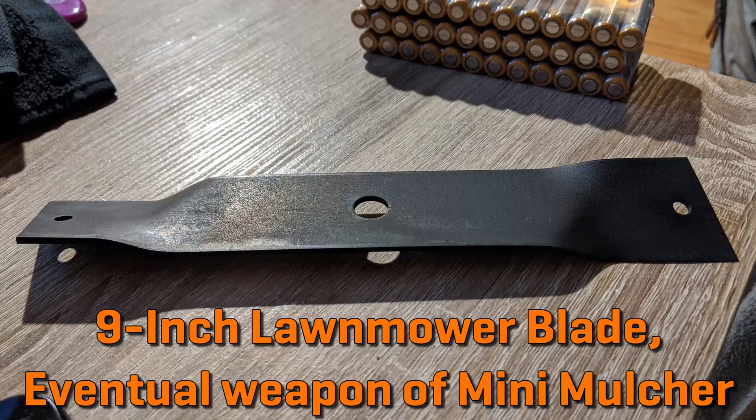I found out about the Mulcher when listening to blacksmith captain Al Kindle's interview on Behind the Bots a couple weeks ago. Here's what he said then.

There was also another bot called the Mulcher that they wouldn't even let start that not many people know about. It was like a lawnmower kicked up at a 45-degree angle. So it was literally the bottom of a lawnmower built into this weird frame, and there's a video of that somewhere too, doing a little demo and cutting up some foam. So it was a learning curve because again, the event runners didn't know what would show up, and you know, some people were a little ahead of the curve with dangerous stuff.

This is pretty much the only photo of the Mulcher that I could find existing online, and the original photo was 300 pixels wide. Yay 1995 cameras. So I've upscaled it about 8 times with a little bit of denoising, and it still looks kind of like crap, but you can get a much better idea of what's going on underneath that really bizarre looking frame from this photo, even though it's still horrendously noisy and gives you almost no real detail of the lawnmower underneath.

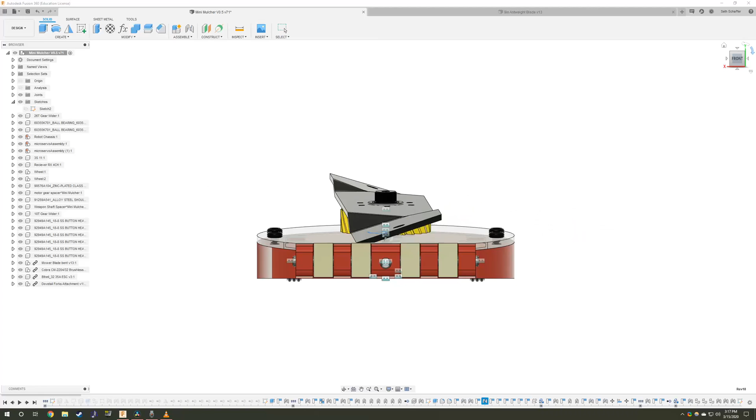As you can probably tell, there were quite a few horrifying things about that bot. To be honest, I didn't look too hard and wasn't able to find that video until this morning, so I designed my entire robot without seeing that. I actually was mostly inspired just by the fact that it used an angled lawnmower blade as a weapon, since about a month ago I was asked if I might be able to use some lawnmower blades for a combat bot and was handed these babies.

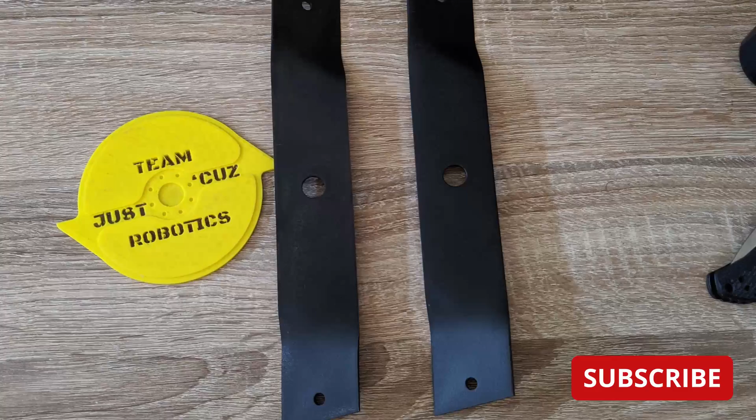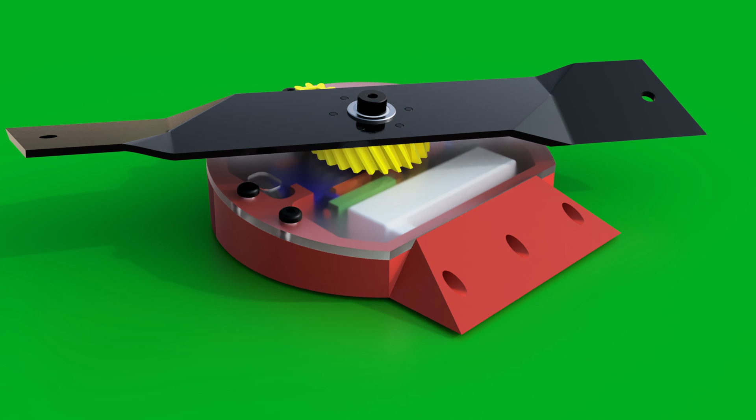So my goal for Mini Mulcher is to accomplish 3 things. 1. Make an interesting Antweight robot. 2. Make it affordable and easy to make. And 3, create a detailed build video series so viewers can follow along. That way, you guys can potentially make this too, maybe as a second build or an intermediate level bot. It would be a bit too dangerous for a first-time builder, but I would say this should ultimately be a pretty simple build for anyone who kinda knows what they're doing.

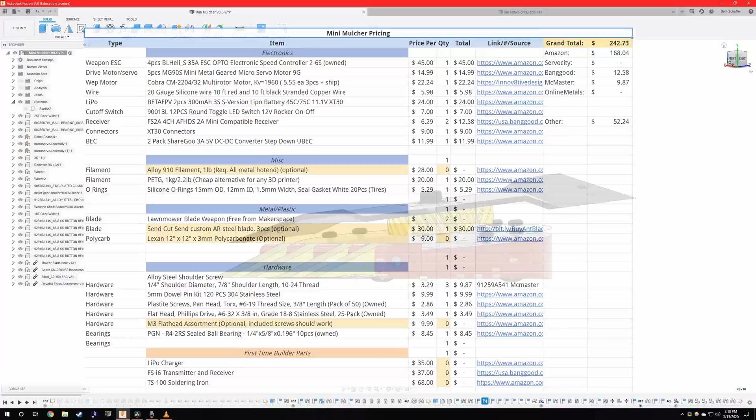The budget for this bot itself is less than $250. It'll be manufacturable with just a 3D printer and basic tools like a handsaw or maybe bandsaw and a Dremel. If you already have wires, connectors, and other common components, you could be looking at well under $200.

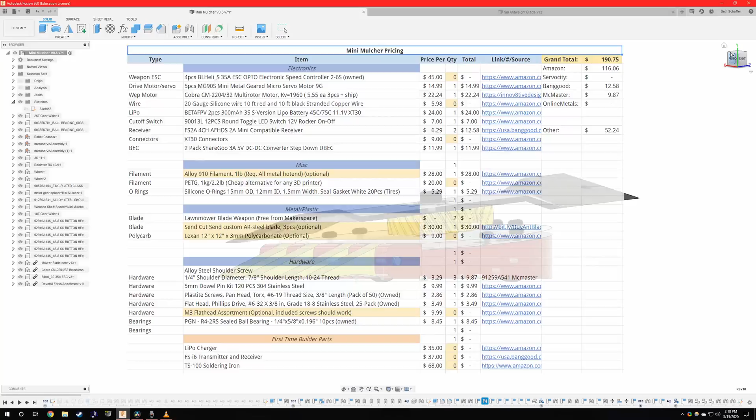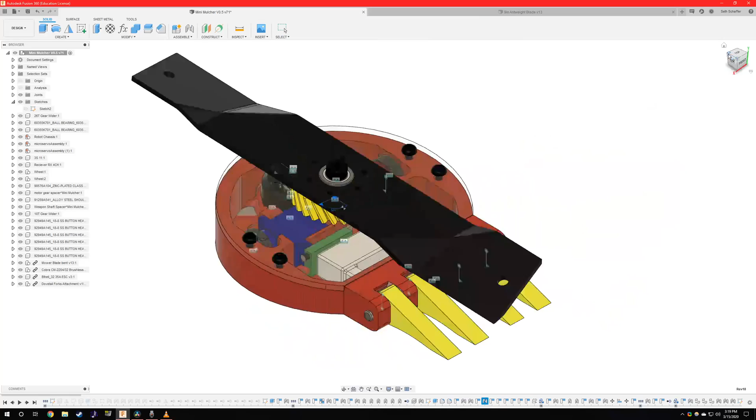Last but not least, number 3, I want this to be my most detailed build progress series yet, so that viewers can learn everything they need from this video series to replicate basically everything I'm doing. I'll have a separate video for the modification of the servos, wiring and electronics, testing, and any changes I make to the design will also be covered. I'm sure I'll need to tweak a few things here or there, since I still need to make some space for a power switch, but I can do that once I have them on hand to measure.

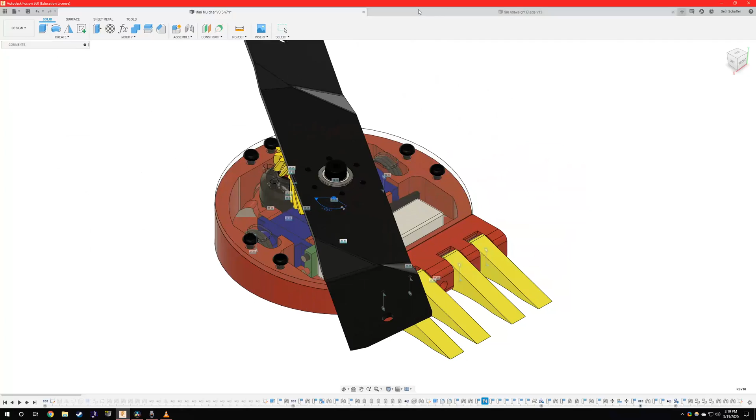Also, I can't find any lawnmower blades like these online, plus they need modification to be used anyhow to get the holes drilled for aligning them with the gear and whatnot. So instead I designed a 3/16" AR500 blade option that anyone can use.

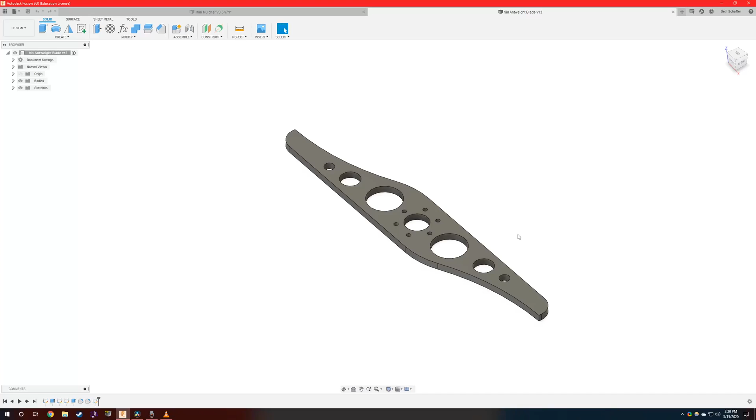And it also is really helpful if you just want to look up what the part number was for that screw that you used in another bot 3 months ago.

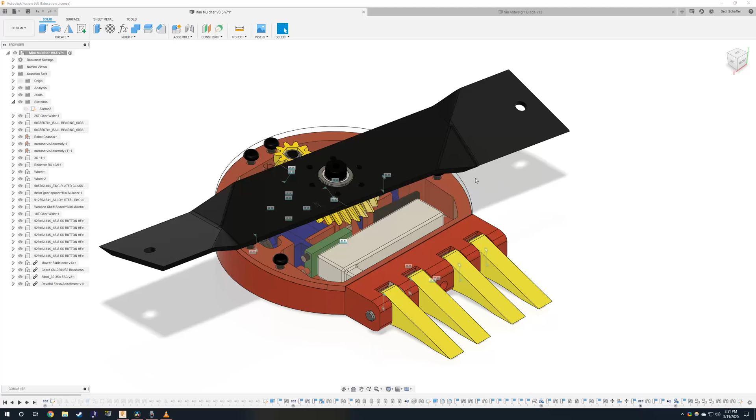Now back to talking about this robot. I weighed the 2 blades that I was given. The lightest one was 5.375 ounces or 0.34 pounds. Pretty heavy for an Antweight weapon, but I could make it work. Furthermore, since it's a 9-inch long blade, this bot would basically have just a gigantic blade for its size.

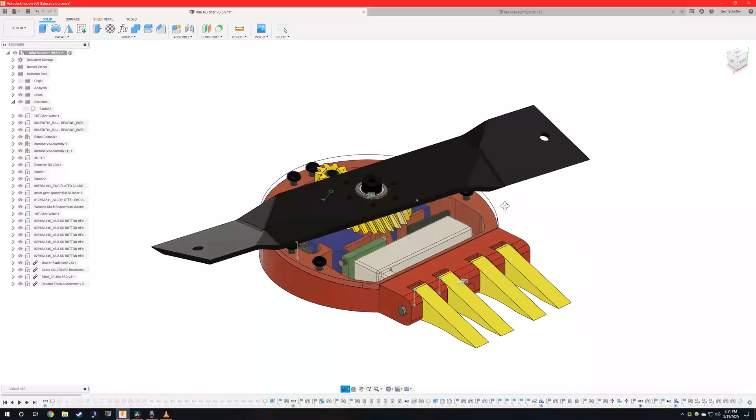I knew that a 45-degree angle on the blade like the actual Mulcher was out of the question. It would be way too unstable. 45 degrees would give me pretty much all of the limited turning mobility from gyroscopic forces that a vertical spinner has, and all of the limited general stability that a horizontal spinner has. So that was definitely not the way to go.

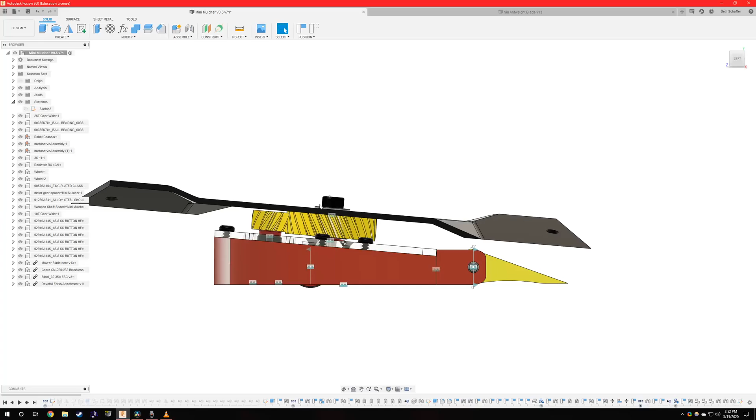I did, however, think that after looking around for different motors, I would need to angle the blade downwards at least slightly just to be able to hit at about 1-inch level or below. It turns out that angling only 5 degrees makes a pretty dramatic difference. This is only a 5-degree angle pictured here.

So with this configuration, the robot's able to hit easily within 3/4 of an inch of the floor with these downwards angled blades. And I think that with the flat blade that I designed, it would still be hitting within 1 inch of the floor easily at the front. It's also hitting about 1.5 inches from the floor at the back, which for taller robots will still hit them for sure.

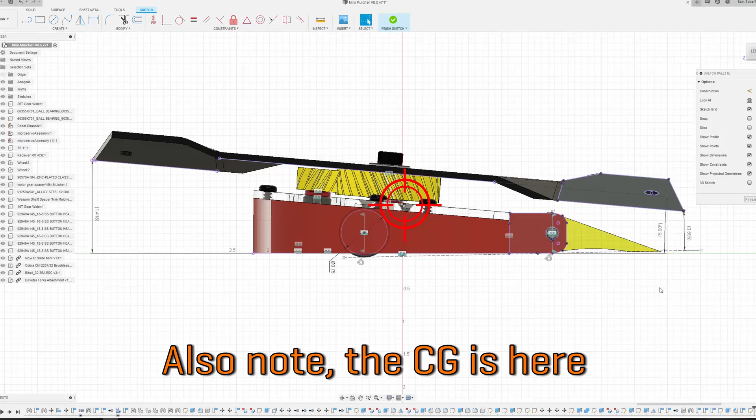I like to make sure that all of my bots have a bit of something different, so angling the blade for this bot is definitely one of those things. Directly driving the weapon with gears is another, but I think for Antweights that should generally be fine, because a lot of Antweight robots get away with driving the weapon directly on the motor shaft, which I was not prepared to do because I knew that that would be horribly poorly supported.

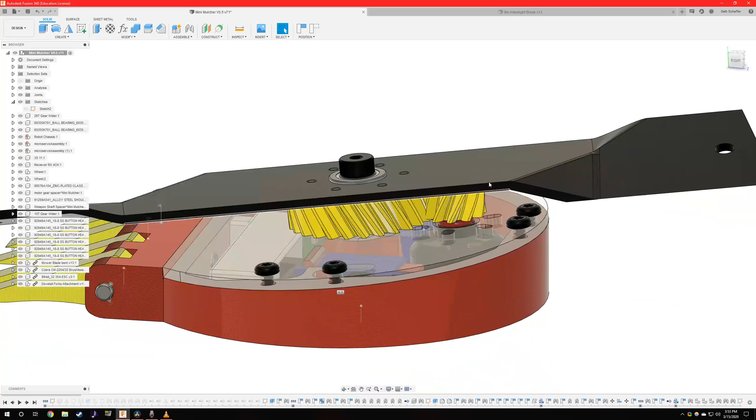This geometry with the 5-degree angle pretty much forced the rest of the robot to be pretty weird though. First of all, as you can probably tell, pretty much the entirety of the component layout is determined by the fact that I need the motor to be at the back so that it can be the tallest component, since the robot slopes forwards and gets a lot shorter towards the front.

I was pretty much forced to put the servo motors in the middle so that I would have wheels in the middle, and then I was forced to put the battery at the front because it was the shortest thing, so it was able to fit at the front, plus it can be best protected there.

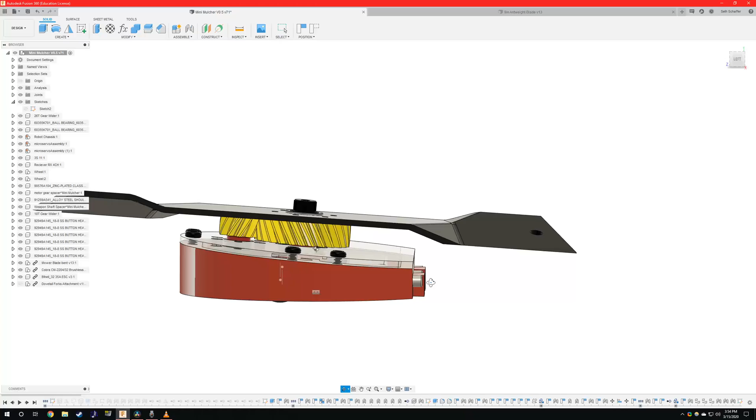I'm designing this robot with a bunch of modular front-end attachments, so I'm basically going to be using these dovetails and then a bunch of stainless steel dowel pins to keep all the front attachments on. I should be able to push these out with just anything that's a smaller diameter into the chassis. I might have to take the lid off and pull the battery out to do so, but that way I don't have to mess around with threading screws into plastic to hold on something that will be taking such tremendous shear loads. And I'm pretty sure that this should hold up just fine anyway.

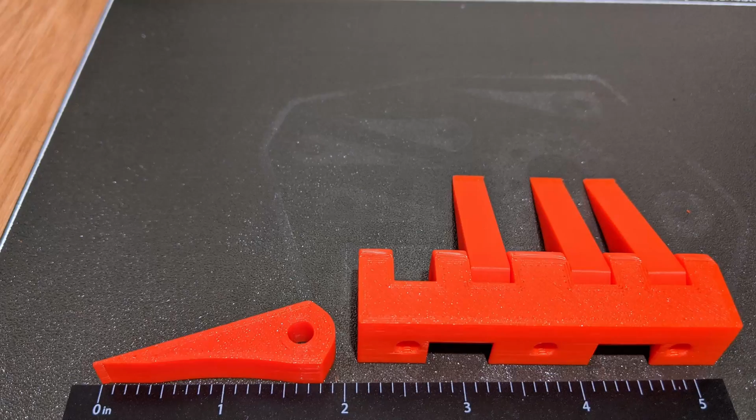This is the heaviest front end attachment that I've designed so far with these hinged little forky wedgelet things. I designed them with this curve on the bottom just so I could tell which side is down, because I designed them to have basically an angle stop. So they pretty much have to stop going downwards at about that angle, which is a few degrees below the floor level, and they have to stop going upwards at about this angle, which should give them plenty of travel to deal with vertical spinners.

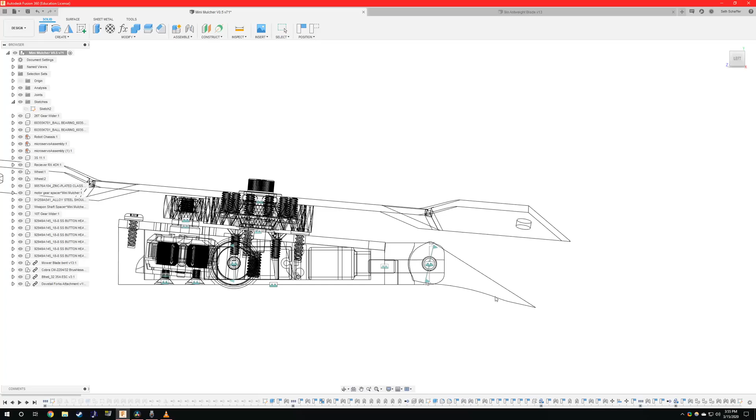I won't have the problem that a lot of forky bots have, where if their forks are like this, they push their wheels off the ground and they can get stuck like this. I don't think that there's any way that the bot will get stuck with the forks at just this shallow of an angle.

It took me a while just to find a motor that I could use that would be ideal for this. So if I hide the lid here, you can get a better look. I can also hide the whole weapon setup actually. This is what the inside of the bot looks like without the polycarb panel in the way. I may or may not actually make that top panel out of polycarb.

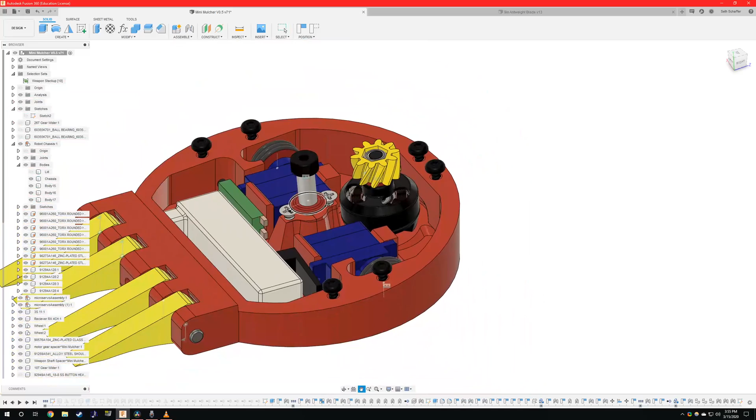I just thought that would be ideal, but it could definitely be 3D printed for ease of access if you don't feel like cutting a circle out with a hand saw, if you don't have access to a bandsaw or something like that, or a CNC router, which I'll probably end up using if I do go with polycarb.

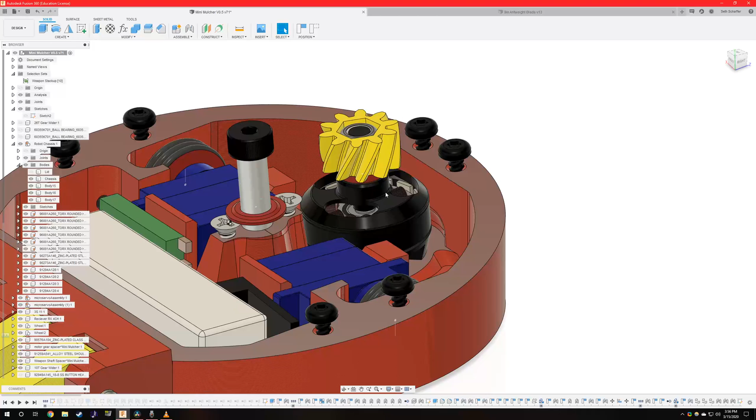So this motor here is pretty much the most powerful short form factor motor that I could find. And I spent a while trying to find a motor that I thought would be suitable enough, like more than 100 watts of power running on 3 or 4S, and also physically as short as possible. Most of the 2212 motors that I see a lot of Antweights and Beetleweights using, just because they're super dirt cheap, have a 12mm tall stator, which means that the entire motor is more like 40-ish millimeters tall.

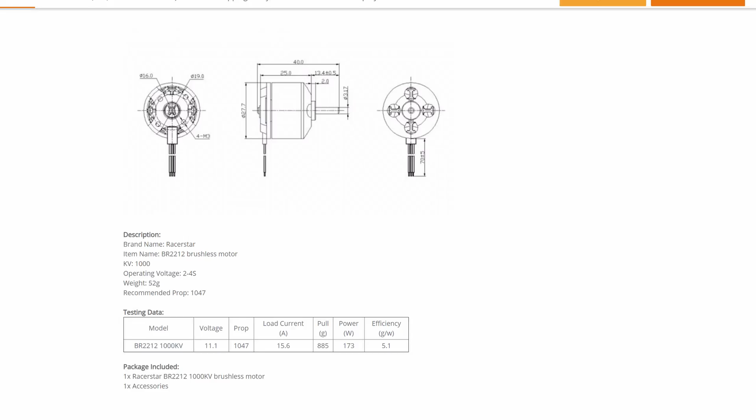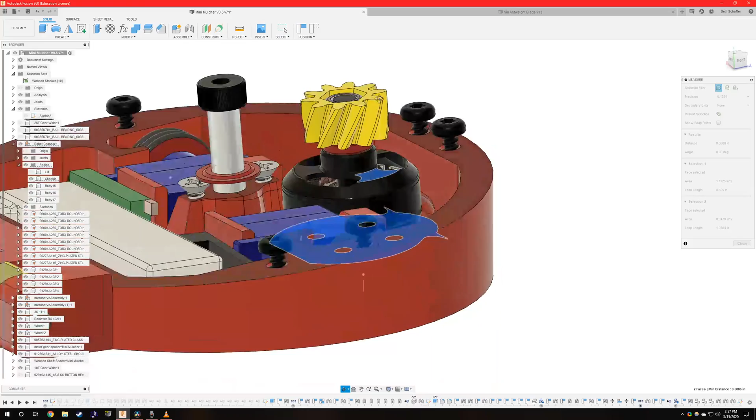I decided that I wanted to use these servo motors for drive, because A, they cost less than $5 a piece, and B, you can get Metal Gear versions of them that are still $5 a piece but can be modified for continuous rotation. Though you can also buy standard RC airplane type 9-gram continuous rotation servos already with the ability to act essentially like a motor plus ESC combo without needing a separate ESC.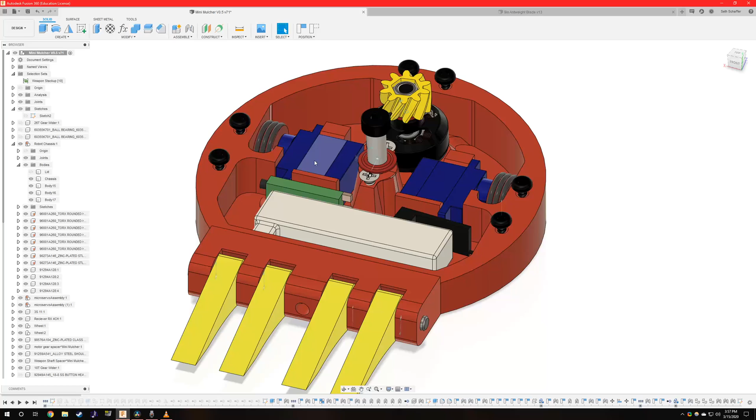So the nice thing about these is that when you hack them for continuous rotation, instead of just going to a set angle like a normal servo does, the board that's making it go to a certain angle is just doing that based on positional feedback from a potentiometer. So all you really need to do is remove a mechanical angle limit and then disconnect the potentiometer at the center position. And then when you tell it to turn one way, it will just go that way forever.

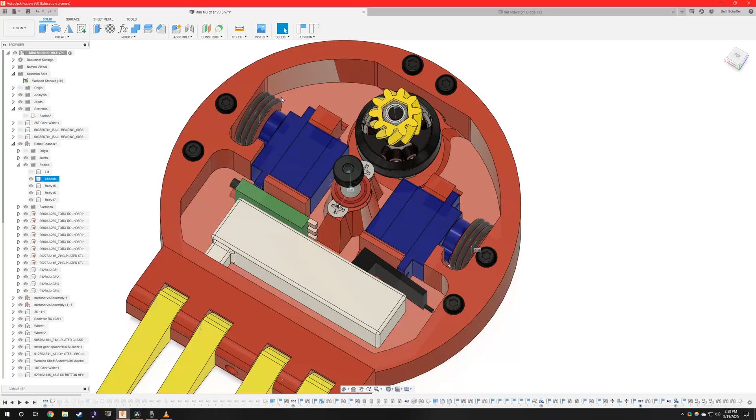And proportionally to how far you push the stick, it will change its speed. So it essentially acts exactly like an ESC would, and you don't need to have a separate ESC. It's just built into the controller board inside these. I believe that they also frequently have some sort of current limiting built in so that they won't burn out. So it's pretty nice to have something like that in a compact package.

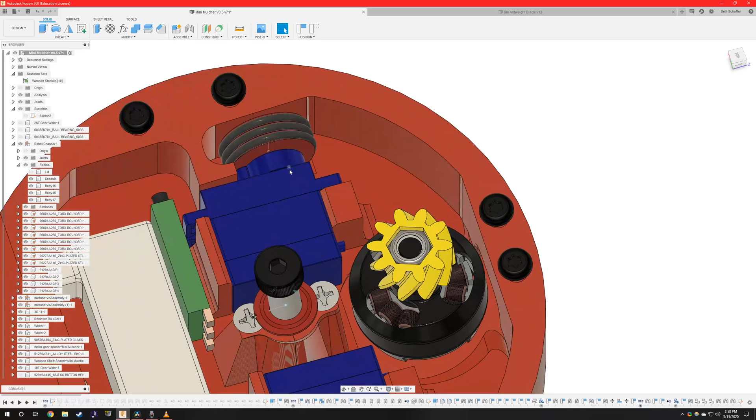The downside to them is that they have a ton of torque, but very low speed. I think that it's rated at like 0.1 seconds to rotate 60 degrees, which equates to somewhere in the realm of 100 RPM. That's really, really slow, especially with wheels that are effectively a 3/4 inch diameter, which is what I'm using here. The wheels, by the way, are going to be 3D printed like everything else, and I'm going to be using O-rings for tires just like I did on Draconid because that seemed to work very well.

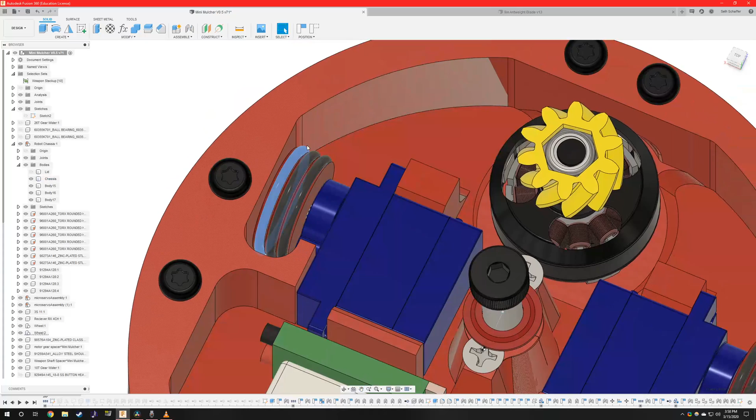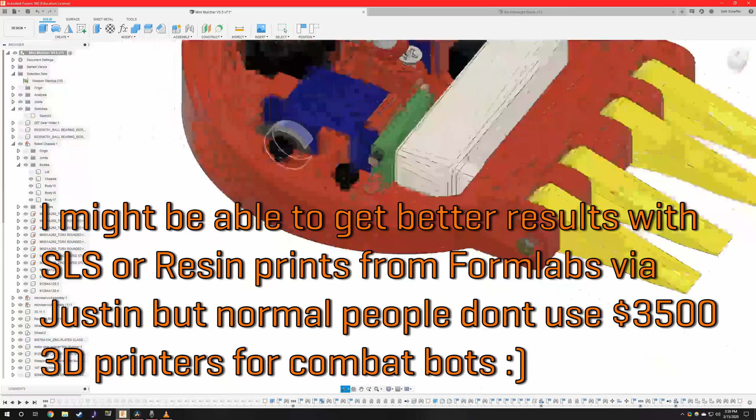So these are going to be 1.5 millimeter diameter O-rings, 3 of them per wheel, and then I'm going to try my best to 3D print this servo spline, but I expect that to go very poorly, so I'm probably going to mostly rely on a combination of gluing them on and then using the M2 screw that comes with the servos to screw the wheel onto their attachment arms. And given how little weight will be on each wheel, like half a pound, I don't think that that'll be coming loose anytime soon. Plus, this robot has protected wheels, so they're not likely to take any direct hits.

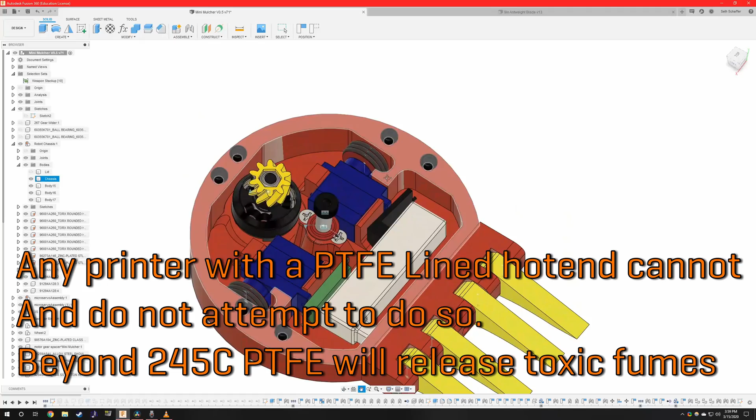Everything that I want to 3D print for this robot, I'm going to be printing out of nylon, but it would probably work just as well in PETG if your printer can't reach the temperatures required for nylon. And you can see that I made generous use of fillets where needed to basically strengthen up what otherwise would be sharp corners and stuff.

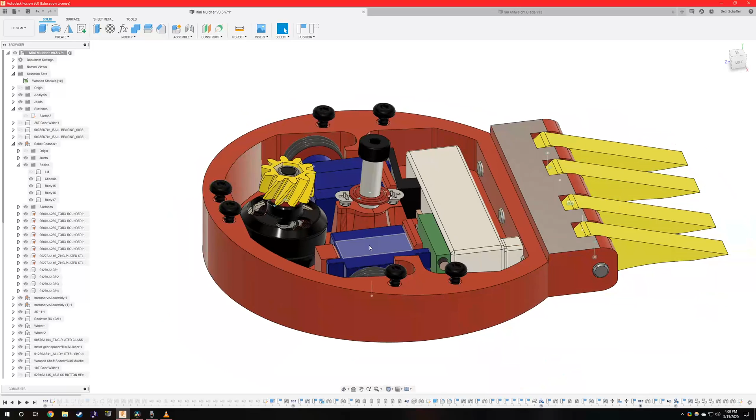I have the servos kind of just sitting in a pocket right now, but what I think I might do is add a separate 3D printed part that's like a little shelf that connects across these points, and then I could add a screw here to just hold it down. Or I might just put some foam on these and then compress it down with the lid, just like I do to hold the batteries in Division and Draconid, because that seems to work pretty well for them.

And there's no way the servo can rise high enough with the lid on to come out of those slots anyway. I just don't necessarily want it to have the extra little bit of wiggle room that it will have. So this robot's very light on screws, which is one of the nice benefits for a 3D printed bot, is that you can use a very small number of screws.

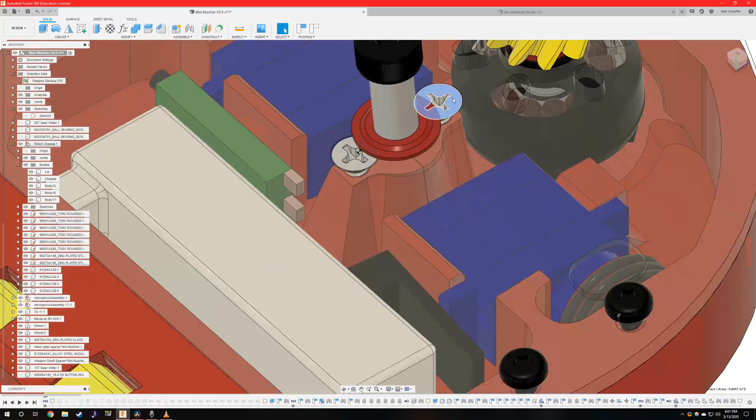So there's 6 on the top here, 2 more here, and then just 4 holding the motor in, and then 2 in each of the wheels. And that's literally all of the screws that I'll need probably for the entire robot, which is pretty nuts. These are all plastite screws around the periphery here, and then I already have some 6-32s from Division, and I already have these plastite screws from Division. These are number 6-19s, and then these are the 6-32s that are just standard number 6 screws.

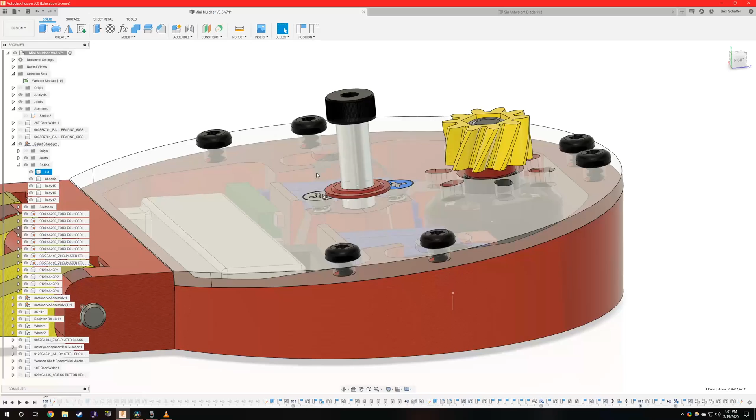They will thread into the plastic well enough here, because really these screws are just to prevent the top plate from being able to flex upward, or basically keep it as flat as possible so that it can't get bumped into the path of the weapon or anything crazy like that. There's no super big reason to have these extra 2 screws here, but it doesn't really hurt.

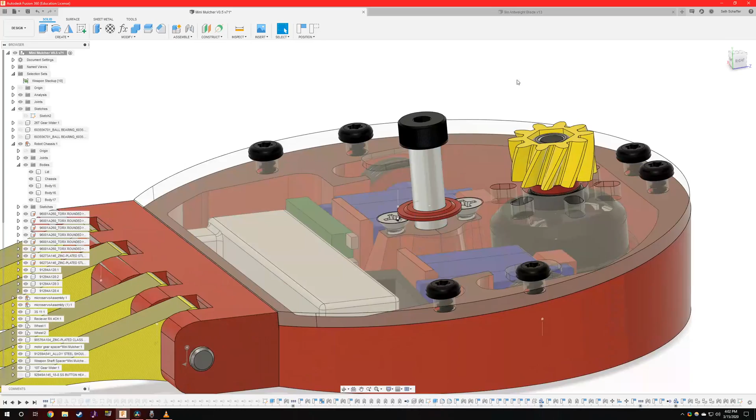So you might be wondering what the hell this is. This is just a standard shoulder bolt, because that worked really, really well for Division's weapon axle. So it's going to be a dead shaft. And the deal with this is I wanted to basically just thread it into the plastic. So this is a 1/4 inch shoulder diameter, which is the same that I used for Draconid's drive axles. So these are pretty strong.

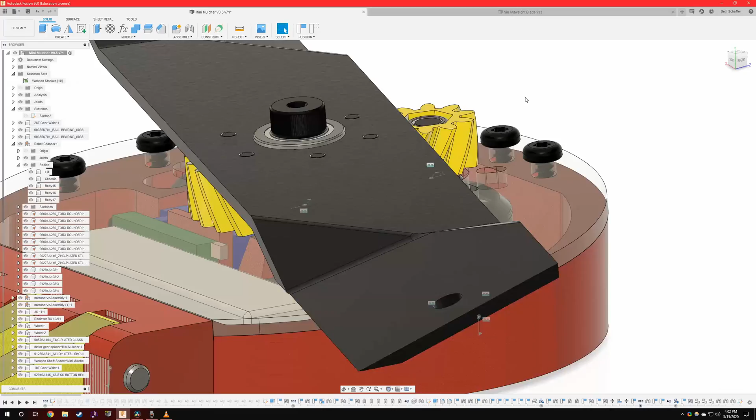They're solid hardened steel. They're ground, so that they're specifically meant to be used with bearings. I'll be using the same bearings that I used on Draconid's wheels in the weapon stack up. So basically, I've got my 1/4 inch ID, 5/8 inch OD, I think they're like 0.196 thick bearings. Those are the standard size for a 1/4 inch ID bearing.

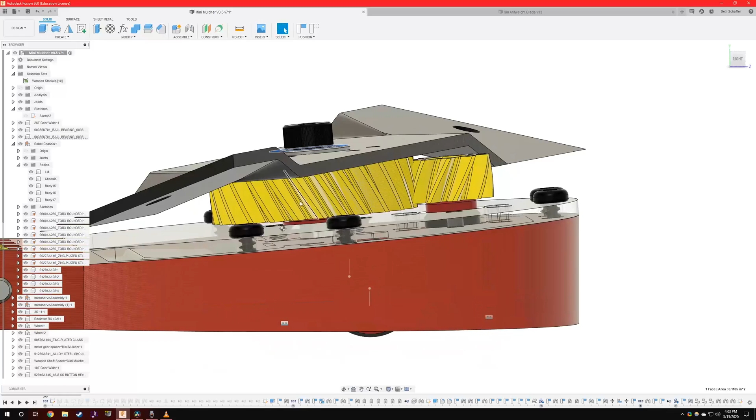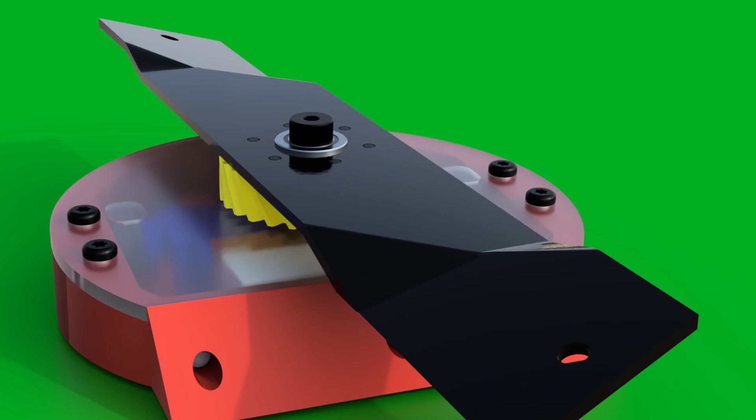I've got one on top, and then there's one underneath that you can't really see because there's a spacer in the way. And then there's a little bit of gap in between them just because that's how the height stack up kind of lined up. You can see the weapon's kind of shy of the top surface of this bearing, which is kind of intentional because when you put the one that I designed for other people to use on here, it's like twice as thick, so it sticks out a bit proud of here. And it doesn't really make a difference either way because as long as the bearing is not able to fly all over the place, it'll be fine.

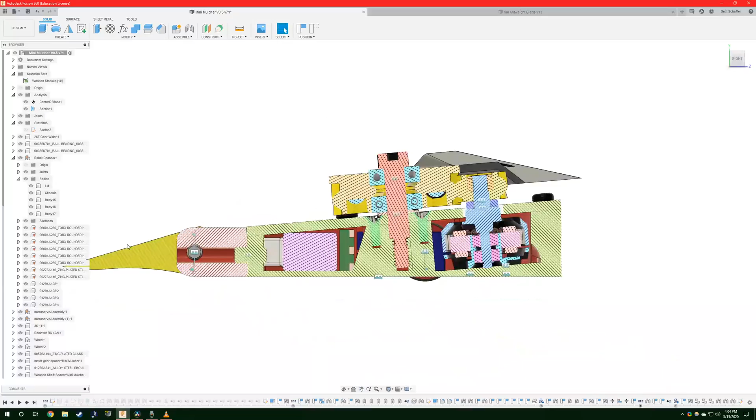So I'm just going to activate a section view here and you'll get a much better idea of how exactly this is held together. So this is basically a section view cutting the entire robot in half down the middle from front to back. And as you can see, I've essentially just modeled in printed threads, an entire 3/8 inch section of printed threads into the chassis and a stop to those threads and a shoulder where the bolt needs to bottom out.

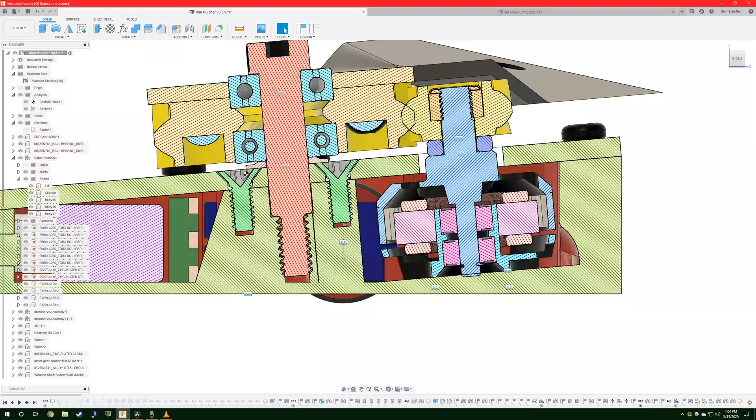So the idea here is that this is a 10-24 coarse threaded screw. So if printed threads are going to work for anything, they'll work for this. And I've had them work successfully for a much finer thread screw in the past, so I don't think this will really be a problem. I'm going to make sure that it bottoms out here, and that'll set the height for everything. But if it needs to be moved out a tiny bit, I can just compress these bearings against this spacer and then change the exact height of the spacer, maybe even just by filing it down to make it the exact right height that it needs to be.

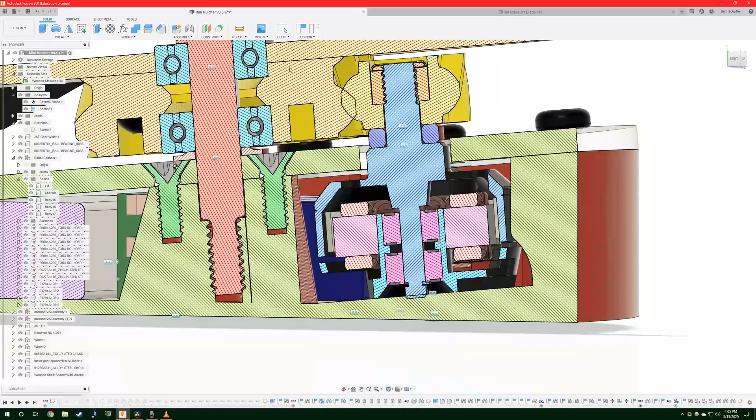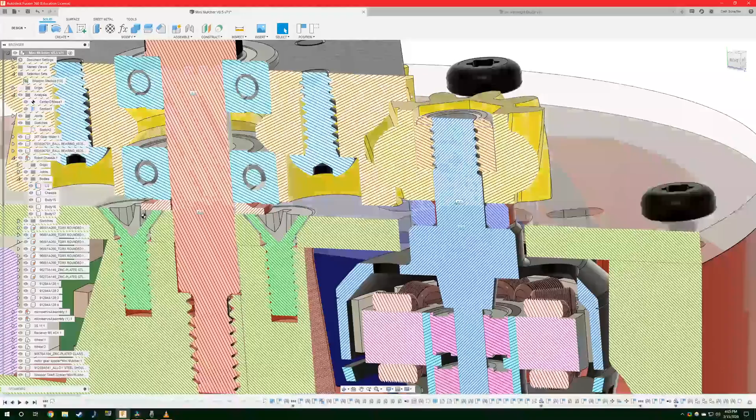It's way thicker than it is on the motor axle. That's to give me the ability to get some of that height misalignment, but also to make it so that if this weapon flexes after being hit a bit, it won't just hit this gear and lop it off immediately from the tiniest bit of movement. So I think there should be sufficient clearance here, but I could always just make this spacer thicker and raise the whole thing by the difference between this point and this point, and then I would definitely have enough clearance.

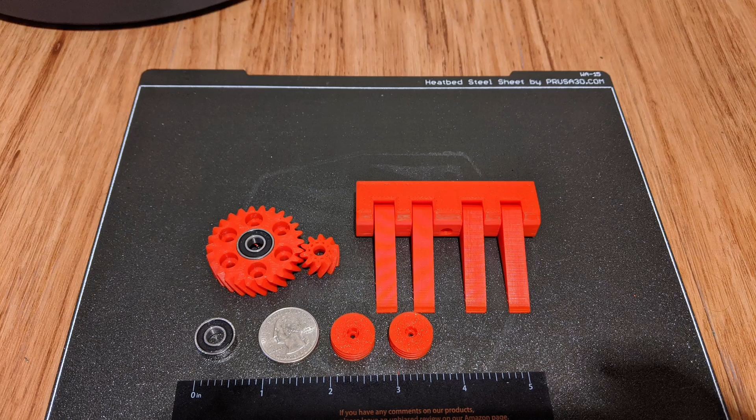One thing that kind of concerns me a little bit about my design here, though, is this gear has relatively little meat to it, especially where the corners of the material are at the teeth. But there's not really any way around that. And I think that it isn't going to be a huge deal because there's no reason that it would really fail because it's just going to be compressed into the steel there. And there is a decent amount of meat here at the bottom for the thickness where it's just plastic on

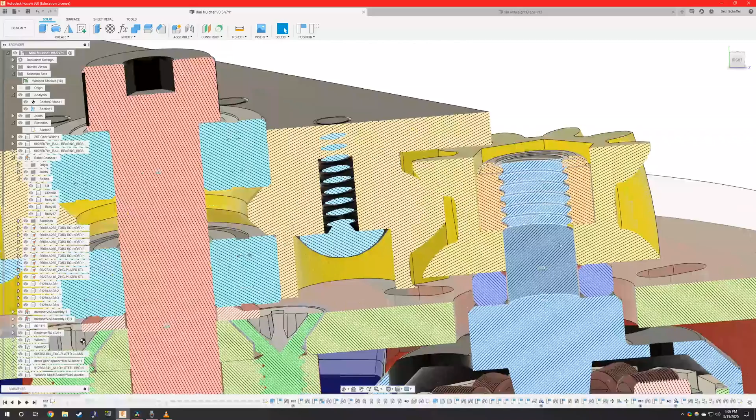the central axle. So the axle of the motor is, I think, 5mm, yeah, it's a 5mm axle up to an M5 thread, which should be only a clockwise thread, because a lot of drone motors come in pairs. You'll get like 4 of them at once, and 2 of them will have a counterclockwise thread, 2 of them will have a clockwise thread for mounting propellers that spin in opposite directions. That would be a problem.

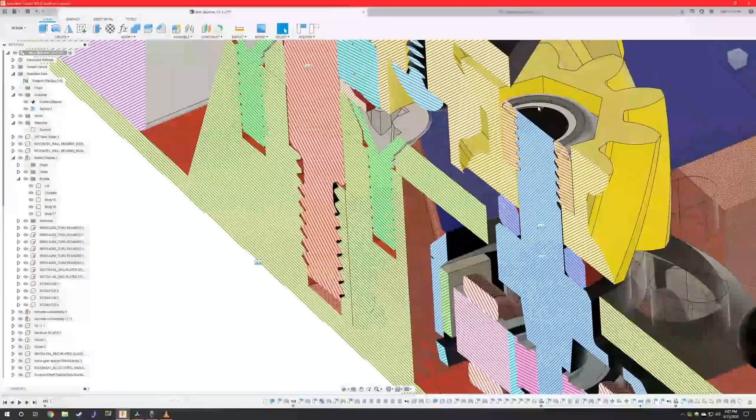But I'm pretty certain that I should be able to use just a standard off-the-shelf M5 lock nut to hold this gear on, and that's going to be compressing this spacer, which is again 3D printed to set the height of this gear, which then compresses directly onto the motor shaft because this is an outrunner, so the entire shaft turns. So this gear doesn't need to be turning separately from the shaft or anything.

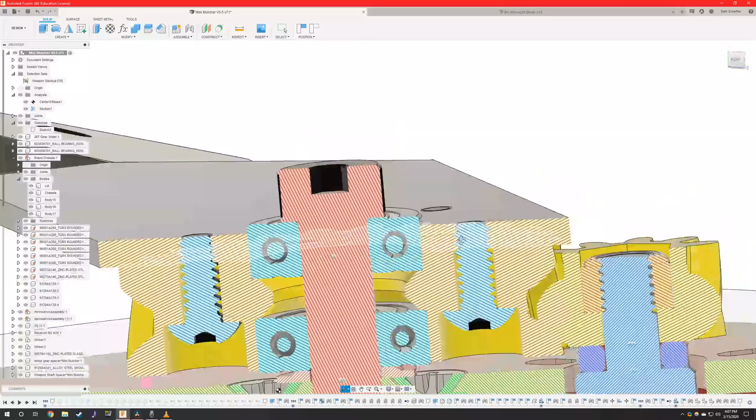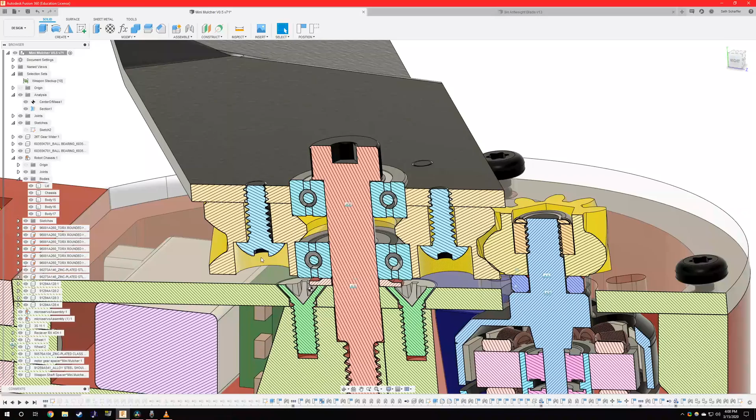So then in the weapon side, I am going to do something similar to what I did with the Vision, using a 3D printed gear to drive the weapon, but this time I'm threading into the steel weapon instead of threading into the gear. And I can make a different version of this that has the screw higher up, or you could just use longer screws than I'm using here when you're using the thicker weapon. If you're going to make this bot at home, I would probably just recommend using larger screws because I already countersunk this way more than you would need to otherwise. You just need the screw heads to basically not be below the bottom surface of the gear, and then you're fine.

And as you can see also, I intentionally have the bearing proud at the bottom, and also you can see the spacer is tapered because it's kind of not great to have both the outer and inner race of a bearing resting on a spacer. You really only want the inner race touching if you can avoid it, because the outer race is what's actually going to be turning. The inner race can be stationary and it doesn't matter. So having the spacer contact only the inner race, which is going to be stationary, just does a little bit extra to reduce the amount of friction. And you can see it already works out that that'll happen on top with the shoulder bolt only contacting the inner race of the bearings to begin with.

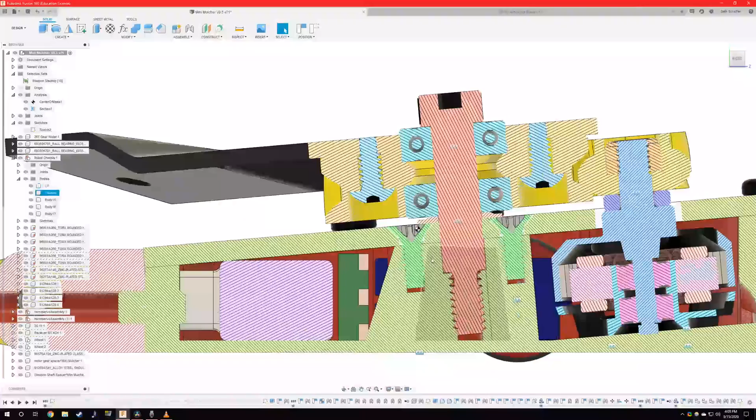And yeah, I have this tiny receiver in here. This is a receiver that's compatible with the transmitter I've been using already, and it's, I think, called the FS2A or something. So it works with any FlySky radio, I believe. It definitely works with the FS-i6. It specifically advertises itself as being compatible with the FS-i6. And it's only a 4-channel receiver.

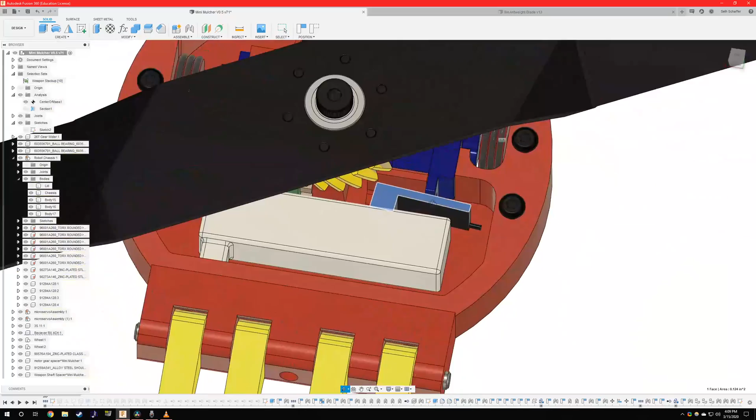I already knew about these because Team Panic did a video about them a while back, and thought that they were the best thing to use in antweights, but he's in Australia. I think he may have been doing 150 gram antweights, so if they work for a 150 gram antweight, they'll definitely work for a 1 pound US antweight, which is way heavier. And it's just a way smaller package.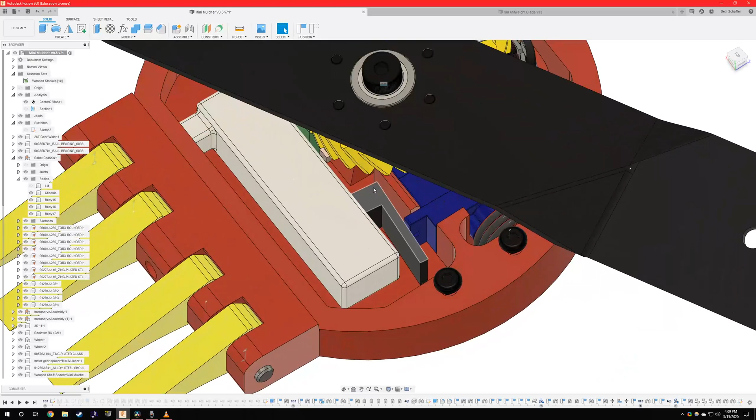There's no way I could have fit the receiver that I put in Division, the standard FS-iA6B, I think it is, receiver. There's no way that that would fit in this chassis. It's just way too small. And this is already up on its side, and it's only a tiny bit shorter than the battery, so it barely fits in here to begin with.

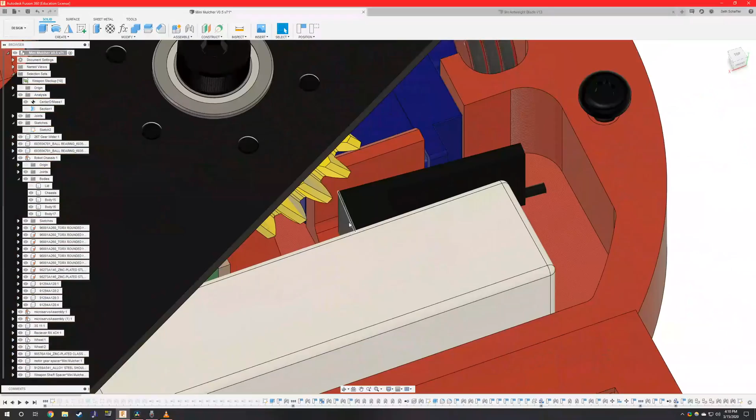I really didn't need to deal with decasing and trying to cover and hot glue the other receiver and then figure out how to bend the wires in. So the nice thing about this is that I didn't CAD it in detail because there wasn't really a need to, but the wires plug in from the side here, not from the top out here. So I can actually fit it in this crevice and then still access it with wires.

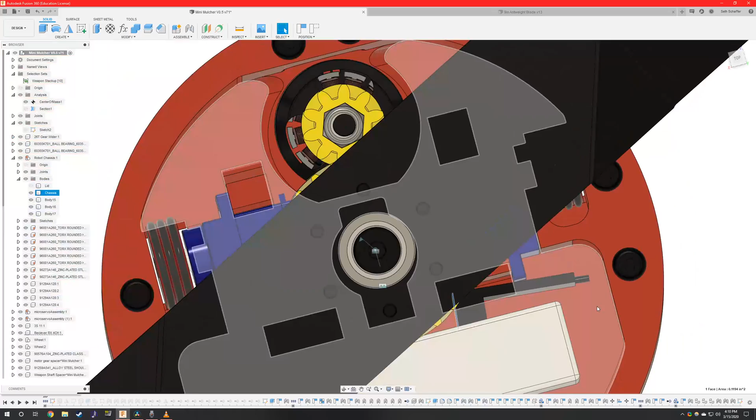And then the antenna is out the back here. I should be able to just wrap it around here. I might make a channel that it goes into or something, or I might just cut it short because honestly I don't think it's particularly necessary unless I'm trying to control the bot from hundreds of feet away.

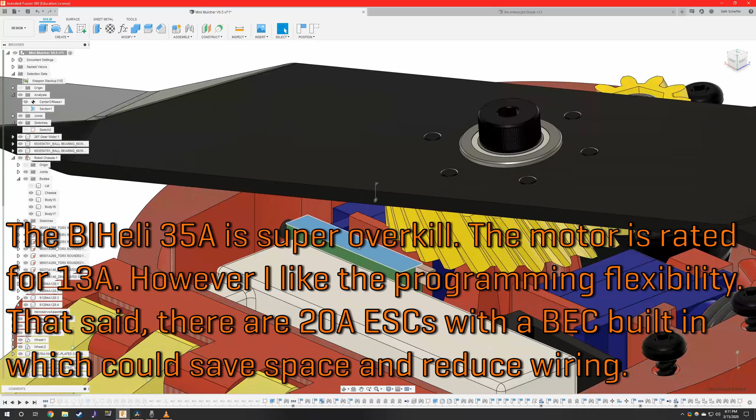This is the speed controller I modeled in. I'm not 100% sure which exact version I want to use yet. I wanted to use the 35 amp BLHeli ESCs, but they don't have a BEC built in, so I need a separate BEC. And with weight at somewhat of a premium and space definitely at a premium, that might not be the best option when you can buy really cheap, not programmable, 30 amp or 20 amp ESCs off Amazon that have a BEC built in.

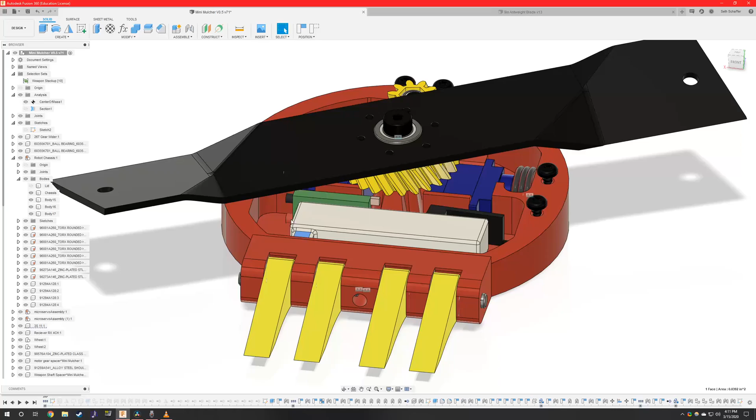But I think for now, I'm going to try and find space for the BEC probably around here and just try and use this. So my wiring would basically be battery wires come out and wrap around here to the BEC and to the ESC, both in this area. The motor wires would just have to be coming either, if there's space, this way and around, or if there's not, that way and around.

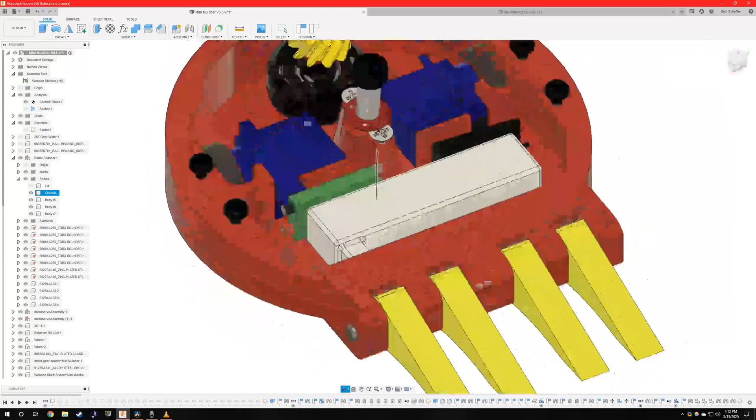And I've had a little cutout here in case the wires need to come out that way. So I think it'll be fine to have them just go backwards or forwards if there's enough room for them to bend around, and then just get connected to the ESC that way. And I'll probably try and fit some bullet connectors in, but they'll have to be in here somewhere and take up as little space as possible.

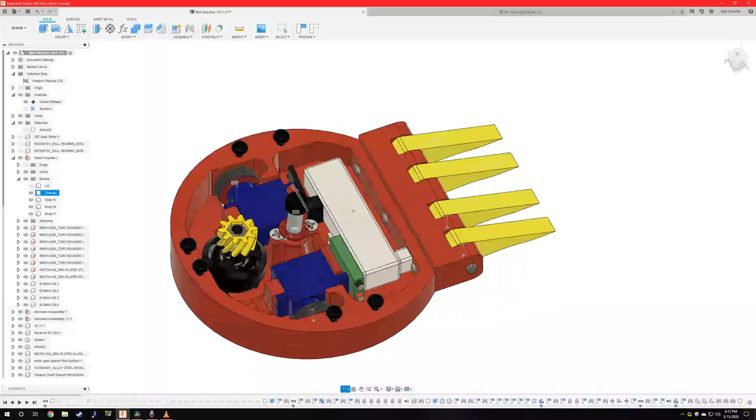And then on the receiver side, the BEC will have wires that go to it. And then the servo wires unfortunately come out on this side, so they'll also need to be routed through these little channels and then just plug into it there. So cable management is going to be kind of a nightmare in here, but such is life when you're designing a hockey puck chassis with, you know, a 5-degree angle sliced out of it.

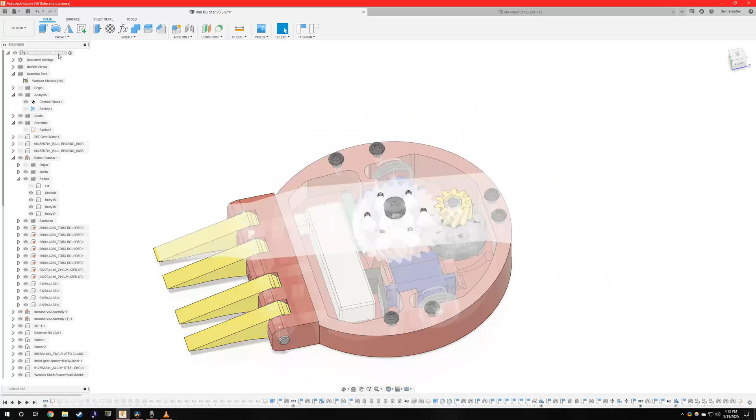So yeah, I think that pretty much covers all of the electronics that I'm using and how I'm planning on routing wires to connect everything up. Like I said, I don't have the BEC CAD'd in here, but right now with this heaviest front attachment, I have about ½ an ounce to play with, so that should be plenty for the wiring and everything.

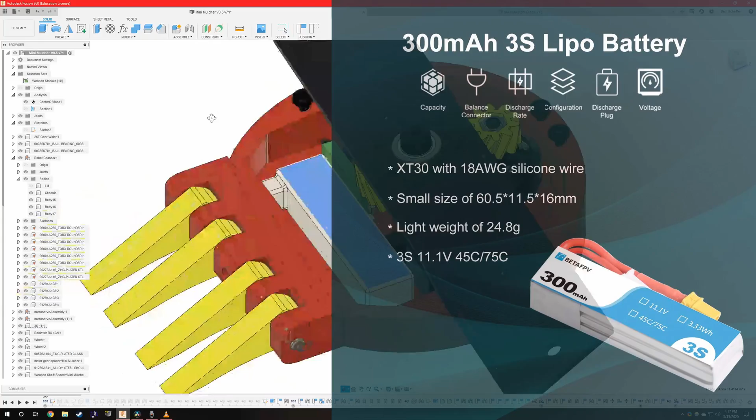You can see in the bill of materials the LiPo that I'm planning to use. It has a fairly weird shape to it. This LiPo on the Amazon listing has 2 different varieties. There's one that's this long skinny pack, which is what I'm using, both because A, it fits in this shape a bit better, B, it's a little bit shorter overall, and C, it is actually a bit lighter than the alternative, which is more typical, where the width and overall length are maybe a 2-to-1 ratio, as opposed to here where it's like a 4-to-1, way longer than it is wide.

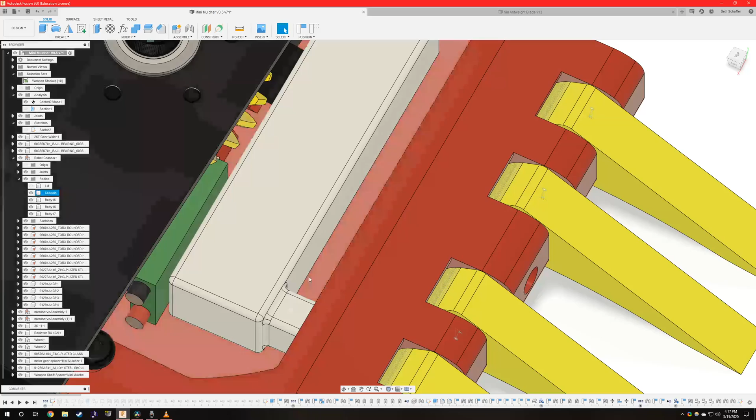And then the wires coming out this side is kind of annoying, and I'm not sure how flexible those will be, but I'm betting that I'll be able to bend them tightly enough to get in here. I might need to add some sort of foam spacer or something in here. I definitely don't want these dowel pins to be punching directly into the LiPo or anything, but that should be pretty easy to avoid without any catastrophic failures. So yeah, that pretty much covers everything with Mini Mulcher.